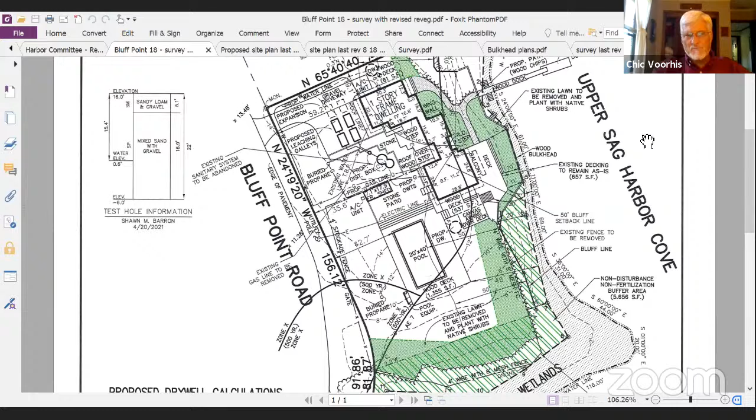My understanding is that this deck was constructed and they're looking to legalize it at this time. Everything else is pretty much existing on the property. We had asked the applicant to look into providing some buffer because there was not a lot of buffer existing, and certainly that's a big part of what we look to do and achieve. A revegetation plan was submitted. Let me see if that comes up. And it's a good native revegetation plan. These are the species: winterberry, purple lovegrass, little blue stem, low bush blueberry, American beach grass, and seaside goldenrod. I found the plan to be well thought out.

And I think that's a summary of where we were. There have been a number of hearings where it's been discussed, and I think I've characterized what the applicant has proposed. If anyone has anything to add, please go ahead. Well, two questions. One, do you have the square footage of the buffer vis-a-vis what it would be if we were to expect the 50-foot setback? I would certainly want the applicant to answer that. What's proposed now is roughly the same as what was initially proposed on this project.

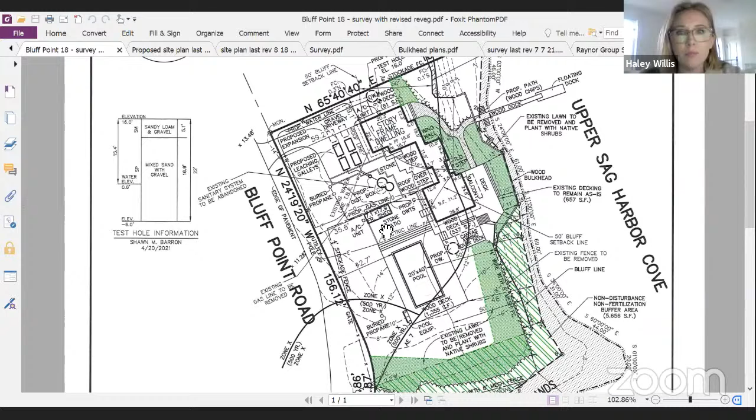And thank you, Chic, for your introduction, but I want to highlight the most significant change since our last appearance before the committee, which is that we're proposing to install a brand new IA septic system. We are abandoning the old system. I don't know if it would be helpful for me to share my screen—I have a version of what we're looking at where the septic stuff is noted in red, so it's a little clearer if that would be helpful. Yes, okay, let me go ahead and share my screen. All right, Haley, give me one minute and I will let you share. Hold on, please.

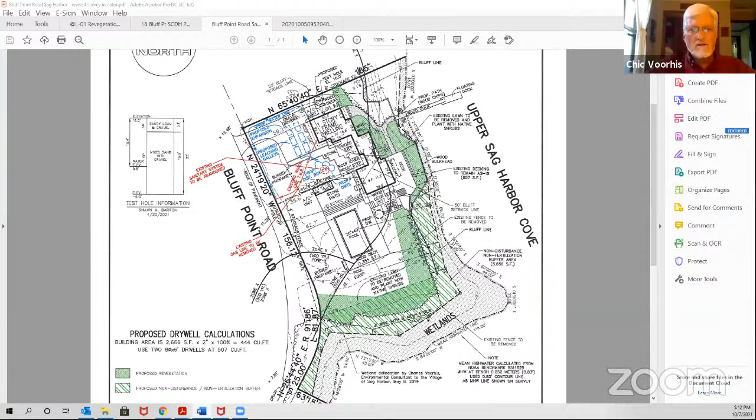It's in letter, green. Haley, you had submitted a letter on September 29th that does indicate, and maybe you can verify, that there is a pre-existing non-disturbance, non-fertilization buffer, which is 5,656 square feet. Yeah, that's right, I was trying to find that piece of paper. So the existing is 5,656 square feet. We're proposing an additional 5,500 square feet of what's currently lawn that is to be reclaimed with native species.

I have a small screen, so I can't quite see. What is the depth, including the old and the new, at any random point? Is it like 25 feet, 10 feet, or 30 feet? Because the property is surrounded by water on 3 sides, correct? Correct, wetlands on 3 sides. Will and I walked this property, it was extremely narrow. I think in some areas you can see what, 10 feet, 11 feet?

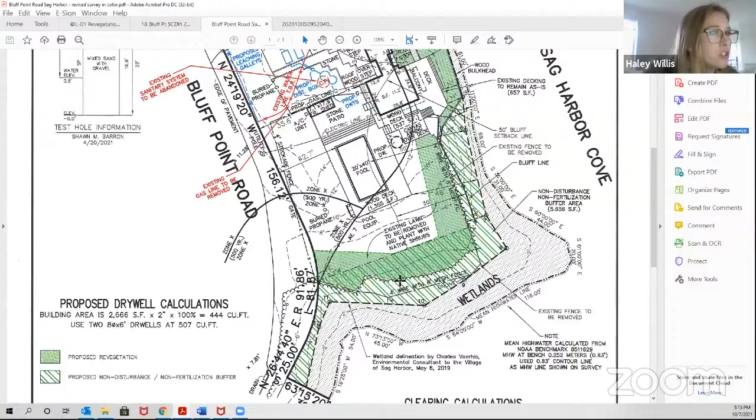I'm having trouble really seeing it on this survey, what the deepest point is, what the measurements are of the depth. We have the area calculations, but I'm not sure that we have point to point. Well, you have 20 feet in, this may be 20 feet here, yeah, 20 feet right there. So you could use that as a scale. And you can add another 10 feet right there, would be 30 feet at that string.

Out of the deck, it's 10 feet. West of the deck is 13 plus the deck. So there's a lot of different dimensions, but I guess the dark green is currently all lawn, and that's the area that'll be proposed for natives. Correct.

Okay, well I really appreciate your client coming forward and agreeing to put in an IA system. I know that we brought that up last time, and it seemed like there was considerable resistance to that idea. So I really appreciate that. And this is kind of retrospective, right? Some of this work that...

We have a canine member here, and it's not mine. Yeah, it's not mine. Not mine, not mine. I lost my train of thought.

Yes, to an IA system, and yes to more plantings. Will, do you have any thoughts here as to whether or not there was a deck constructed years ago? Is that correct? This is in the spirit of what we asked, and I'm glad to see that they were able to fit the IA where people had said in previous applications that they couldn't put it in a driveway.

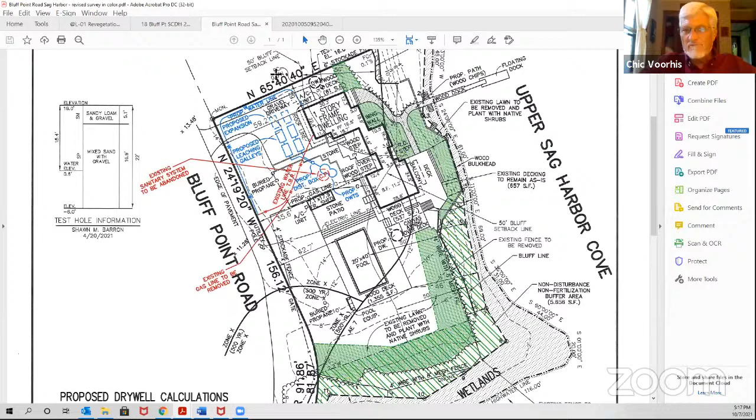I think that's a really good point. And I think that all the drainage coming off the roof would hopefully go into a dry well. Chic, does that look feasible to you from where you are? It is a little difficult to tell. There is a new proposed dry well on the north side of the one-story frame dwelling. Haley's pointing at it now.

But it's not clear whether that's for the driveway. I wonder if this maybe would. There's a dry well down by the pool, but I assume that's for the pool because that's a requirement as well. Can you use a pool dry well for a roof drain?

Good question, Will. Conceptually, you drain the pool not very often. And I think if it's been sized properly, it's been done. I think it has been done. You're not going to drain the pool in a big rain, I wouldn't think.

Exactly, no. So maybe that would be something to look into, to see if the dry well on the west side is for the roof drain - I suspect that's in there for that. I haven't looked at these drawings that carefully, but if there's a rain runoff calculation, a roof calculation, it needs to be there for the building department.

I've got another option possibly. This property currently has one or more cesspools - is that correct? In the old septic system, I would think so. They can be changed to be used as dry wells for runoff. They can be? Can be, yes.

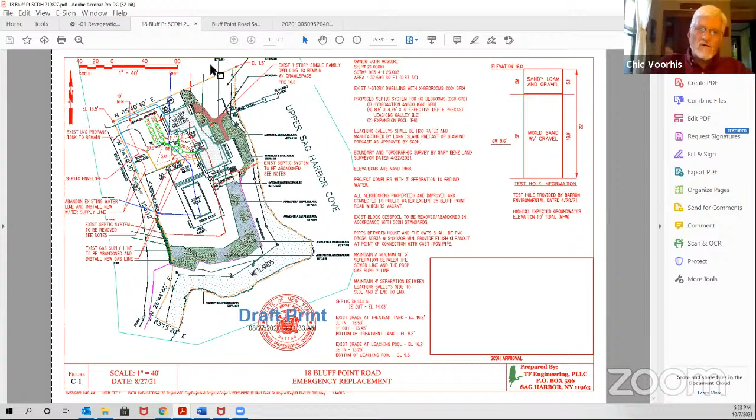Is that not true? Again, they're showing it, they're sizing it. They are showing it from the roof here. No, I don't see all the leaders and gutters, but that could certainly be a condition.

The purpose of putting those dry wells there, the gutters are integrated into the roof design. So the gutters are actually there. This is the leaders. Yeah, that's pretty simple stuff. I'm just saying I don't see it on the plan because I just don't get to that level of detail.

All right, so what I'm beginning to feel here is that people are happy. They're delighted that we have an IA system, that we have increased buffer. And there's just this little question about whether or not we can get a connection between the roof runoff and the dry wells.

So I suggest we ask Chic to write a decision and to put that as a condition of the approval, subject to his agreement that the situation is taken care of, and we go forward. I agree. Everybody agree? Okay, may I have a motion, please, to that effect?

We need to close the public hearing, Marianne. Okay, first. So may I have, I'm sorry, I just lost my focus for a moment. Can we have a motion to close the public hearing here on 18 Bluff Point Road? I so move. Thank you. A second, please. Thank you. All in favor? Aye. Okay, thank you. Thank you very much. It's a great project.

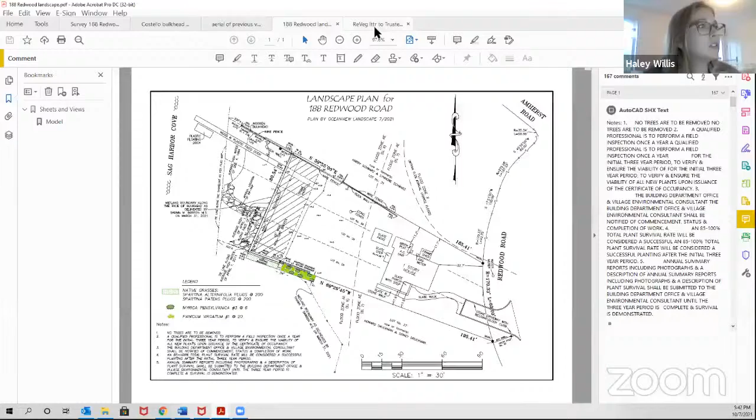So we went down and looked at the area, and I noticed there's an area that has sort of burlap stuffed things that are holding up the bulkhead. Is that, or that are acting as a bulkhead? Is that what they want to repair? And then behind that—sorry, go ahead. No, after. My question was, so is that the area they want to repair? And then there's an area that has, I guess, beech trees.

And then they want to put a bulkhead along there. Yeah, the bulkhead is existing. So I think to the extent that you saw sandbags that might have been placed there in the interim while this application is pending, that's just to sort of keep everything at bay. And then we would be extending the existing bulkhead by 24 feet back inland.

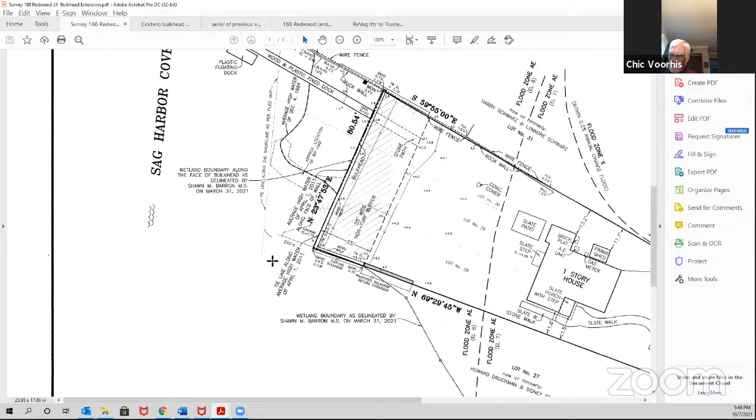Yeah, I think the issue here, Haley, is that this property, because of the existing bulkhead, sticks out farther, for lack of a better term, and there are wetlands and tidal inundation areas to the east on the neighboring property. So that gives me some concern that a new structure, even though it seems like it's back from the existing shoreline parallel bulkhead, could have some adverse effect from scouring that I mentioned before.

I agree with everything you said, and I'd also be interested if you have a planting plan, because when we were down there, there seemed to me to be significant trees right there on that lot line. I don't know what the future is of those trees if this plan were to be approved.

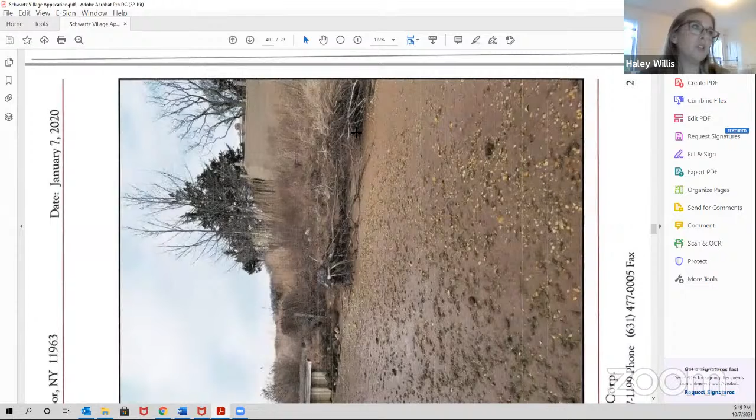Those trees probably do more to secure that shoreline than the bulkhead's going to. So the trees - this is a picture sideways, but you can see that I believe these trees are down now. This is what was cleared. And as you can see, this is sort of the erosion that we're concerned about, that everything is falling out the side of the existing bulkhead, as it were.

So this would be extended back to hold that together. But there's not much left here in the way of trees.

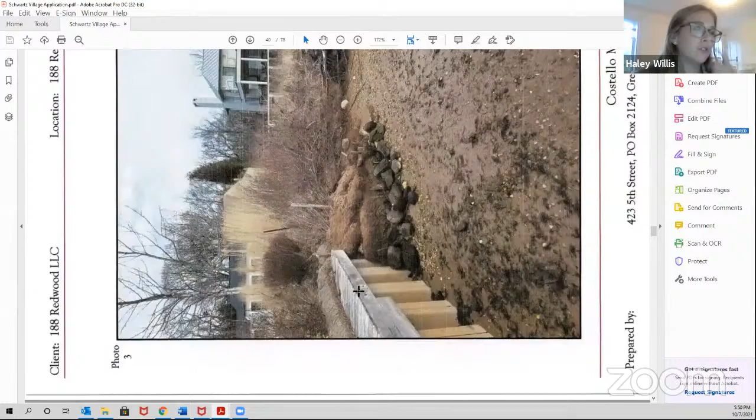Haley, you and I went there today. Didn't we see significant trees that looked like they were right in the path of this extension? It's hard for me to look at a picture sideways. I'm sorry, let me try to fix that on the computer.

Chic, do you think when this property was developed that the bulkhead was built, some kind of retaining wall was built, and it was backfilled to increase the footprint of the lot? Oh, I do. That's certainly what it looks like based on aerial photographs.

Yeah. Not much we can do about that, is there?

No, but I think Chic is right in saying that this area here, where it's all brambled and leads into the existing bulkhead extension, begs for a natural shoreline kind of answer.

Chic, quick question for you, along the lines of what Mary Ann just said. If the applicant were to attempt a solution using a more natural shoreline approach, how long would it take for you to be able to say it's working or it's not working? How long would something like that take to prove out?

Well, it's really up to the applicant to have a designer bring forward an alternate proposal that they feel would be successful.

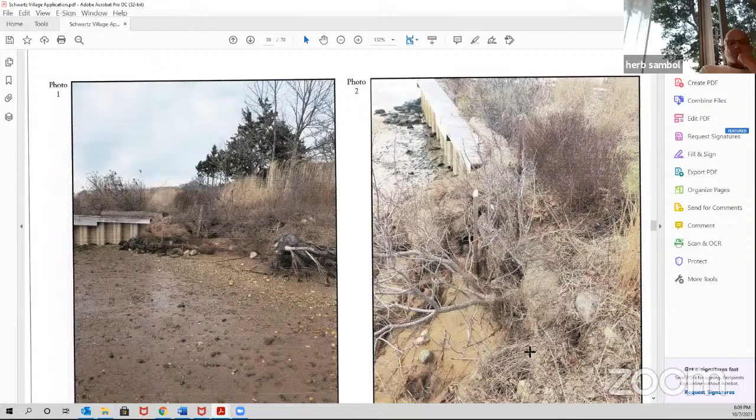I didn't understand what the problem with the existing bulkhead is. Neither did I. Just checking here, because that's not part of the application at this time. The application is just for the 24-foot extension, the way I'm reading it. It does not include the existing bulkhead. It looks fairly substantial. Is it compromised in some way?

Yeah, I mean, the project narrative that we submitted says it is in need of repair to the existing bulkhead. I don't have any photos of what is needed there, but my understanding was that the bulkhead did need fairly urgent attention.

Well, it's kind of surprising here, because we think we only have an application for a 24-foot extension. Did you write the application? Yes.

Chic, when you saw this application, did you understand it to be repair of the existing bulkhead plus a 24-foot extension? I'm looking at the plans, and at this time, again, it's all moving quickly and we're juggling files, but I do not see anything that makes reference to rebuilding. It just says existing bulkhead, and then the proposed part is the 24-foot extension. So I don't see anything in the application that suggests the existing bulkhead is being rebuilt.

That's the plan. I'm going to double check the narrative while we're talking. I guess when I went and visited it, I saw the area that's being eroded - would riprap be the solution, as opposed to starting another bulkhead repair, as we've just discussed, or planned?

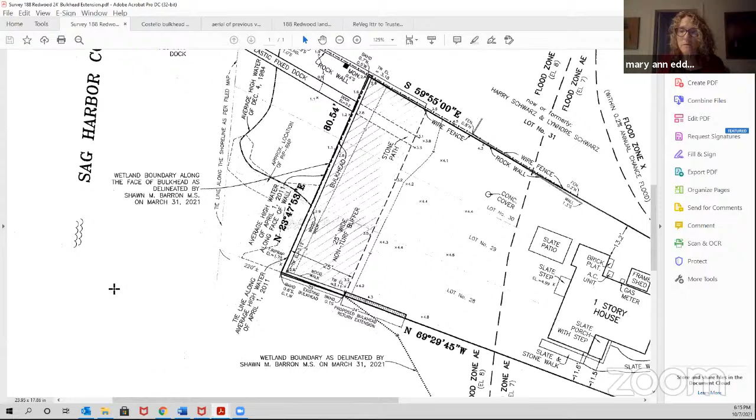Okay, so that's 188 Redwood. We've now moved on to 10 Yale Road. May I have a motion to open the public hearing? I so move. Second, please. Is all in favor?

Aye. Is there somebody who can speak for this application? Yes, Melissa Dedovich, Peconic Environmental Associates.

Hi, I'm joined by Brian. Actually, Brian DeSessa was supposed to join us tonight, and unfortunately he was unable to make it, but never fear, we can still do this. I'm joined with Elizabeth Sammartino from Blaze McCoy Architects, Stephen Naroda from Aris Landscape Design, and the property owner, Dan Marsili. Liz is going to be kind enough, if Doris, if you could share your screen with her, she has all the presentation materials ready.

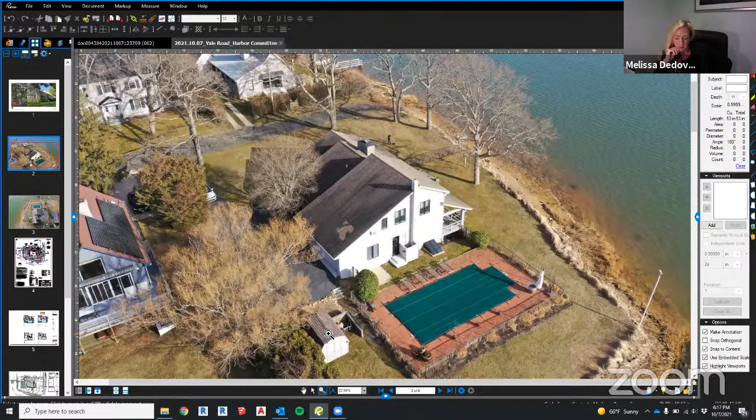We also have the existing detached shed, and there's an LP gas tank as well. There's a slate patio, if you can go to the next picture. You can see it with the table on it, on the left-hand side, as well as a 1,981 square foot asphalt driveway and parking area.

There's a substandard septic system right now between the house and Yale Road. And the house itself, I just said there's a clarification on the notice, it was incorrect. The house, and where the proposed work is going to be done with regard to the house, is located in a FEMA X zone.

So my clients purchased the property for their family, it's their full-time residence, in 2016. They have two young children, and they needed some more rooms. Originally we thought we were going to demolish the house and build a new house, but as they lived in there, they realized it was a pretty solid house, so they'd rather retain and renovate it than demolish and build new. So they hired me and the team in 2018 with the thought to come up with a plan that was sensitive to Sag Harbor Cove. The team met with Tom Priato to review our requirements, our zoning, and the environmental concerns for the property.

We spent the last 3 years getting our DEC tidal wetlands permit and our health department board of review, because where it's located, it needed board of review and about 5 variances from the health department, which we obtained. We also got village ARB approval while waiting to be heard by your board, so harbor committees are our last hoop to jump through.

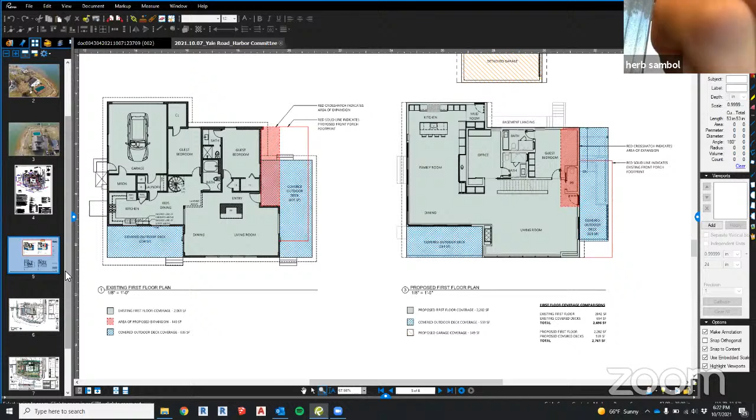Okay, next if we can go to the existing landscape conditions. I'm going to have Steve here from Aris Design go over this portion of the project. Sure, good evening everyone. This is Steve Naroda with Aris Design. Thank you for the opportunity.

Melissa kind of covered it, but the existing conditions are predominantly lawn area within the 50-foot buffer. As you can see in that aerial image, it amounts to about 90.5% cleared within the 50-foot buffer. With what we're proposing, we're reducing that by over 50%, down to 36.9%.

And adding in a robust native planted buffer that will complement both the surrounding setting and the lifestyle of the homeowners. The pool area right now, as Melissa touched upon, is fairly large. It's a vinyl pool sitting within groundwater, it does not have a dedicated dry well for backwash, and it's a little lower than the finished floor of the house.

So we saw this as an opportunity to introduce a pool that would be environmentally sensitive. It's a saltwater gunite pool, and we're retreating from the wetland approximately 5 feet with the new pool, and we're going to have a dedicated dry well for pool backwash. There are some significant native red oak trees surrounding the south and east sides of the property that we're preserving.

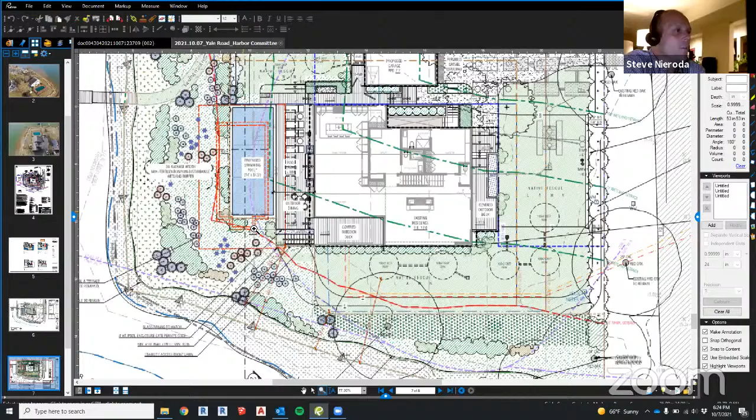On this diagram, you can see the red dashed line on the west side of the house, that's the existing pool area. The pool patio extends to the west of that, a little larger. You can see the new pool retreats from the wetland and it raises up. We match the pool terrace, or the pool coping, with the house deck, so we're able to get above groundwater.

I think Liz is trying to get to the section we created. You see that red dashed line, that's where the current pool sits. It's a vinyl pool, been there a very long time, since the 1980s. Suspect it could be leaking. It's chlorinated. So the proposed pool is now being lifted to a higher elevation and will be totally out of groundwater, so no dewatering will be required for the new pool. Actually, no dewatering will be required for the project in general.

Graphically on this site plan, you can really see the amount of buffer we're introducing. It surrounds the whole west side and south side of the property. The buffer will be equivalent to almost 7,000 square feet of native vegetation planted on the property. Anywhere we're showing upland areas of lawn, we're calling it native fescue lawn, a native fescue seed mixture, further reducing any need for chemical and fertilizer inputs.

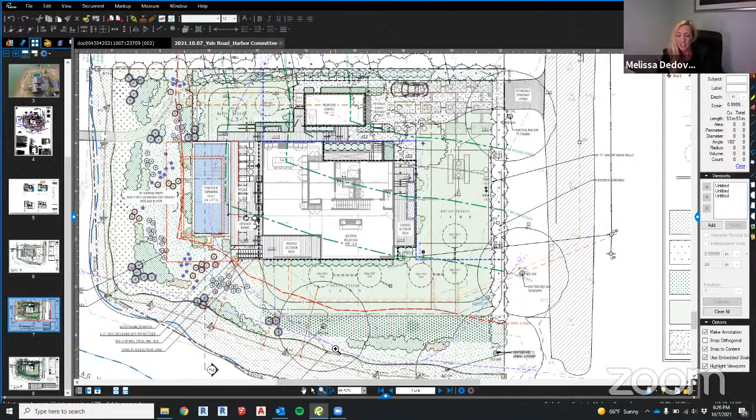We've filed a construction plan and methodology. We'll be using project limiting fence around the proposed area of disturbance. Just to note that everything being done is within the existing limits of clearing, we're not extending any further towards the wetland. In summary, I'd like to reiterate that we've received all our approvals to date. We have full support of the neighbors, who provided letters for both the ZBA and ARB applications. All work is to be contained within the current site disturbance clearing. The existing legal dock is to remain, no dewatering during construction. And we believe we meet the requirements outlined within the village code for a wetlands permit. We're here to answer any questions.

Not exactly, because you're putting a pool within 75 feet of the wetlands. Where a pool currently exists and was legally installed with a DEC permit back in 1980. In 1980, right. Chick, do you have some comments on this?

Well, I hear both sides of it. Mary Ann, you certainly mentioned the village setback is 75 feet. Their plan shows the 50-foot setback, and it basically goes through the 50 and the 75. The 50 cuts through the existing house, and the 75 cuts through most of the existing house. So it is an existing condition, but we do recognize it's a sensitive piece of property, with Colgate Basin to the west and Upper Sag Harbor Cove to the south.

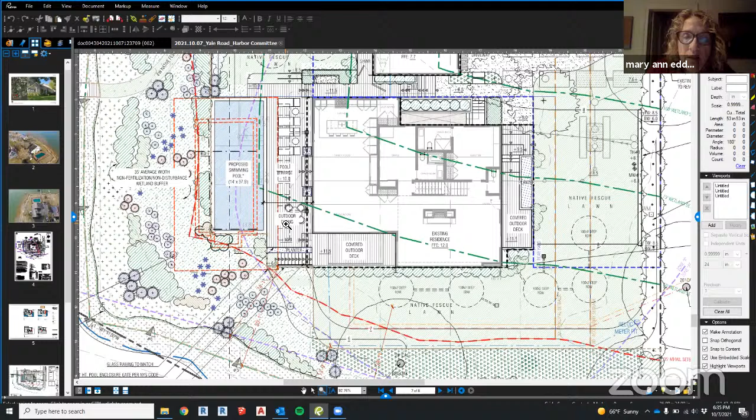Chick, are you familiar with the kind of pervious decking they're talking about? I think when Melissa said Ipe, that's just a wood material. It's just wood decking, not stone and mortar. It's probably on sonotube, not concrete or solid stone. There's usually some spacing so the wood doesn't rot, and it allows some penetration of stormwater through it.

Just to chime in, it's not set on a concrete slab. This will be pervious material below the deck, so the deck is floating above that pervious material. So it's a basic wood deck. Yeah, correct. So yes, I'm familiar with that, and it's Ipe wood, so it's tropical hardwood.

What's the depth of the deck from the door to the pool area? It's 14 feet from the door to the inside coping of the pool, of the proposed pool. Got it, thank you.

And like you said, except for the self-contained portion of the septic system, the actual leaching fields, those aspects of the new septic system are a minimum of 100 feet from the wetlands, is that right? Actually, the term you used is correct. The leaching field is beyond 100 feet. Yes, right, and that's the minimum for the village wetlands.

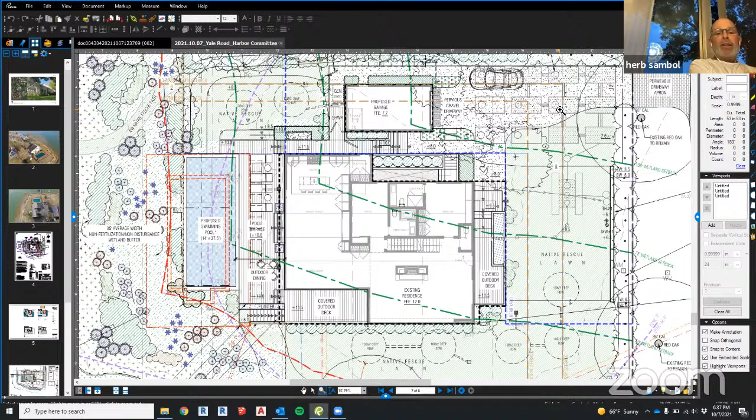And I'll tell you, we spent almost 2 years with the health department, if not 2.5, because we had to go back and forth. The IA system, this was before we had to, so we wanted to do an IA system to present to the board. And we ended up having to go to board review and receive at least 5 variances from them to do this.

Melissa, are there any other variances that you're requesting, for example with respect to lot coverage or anything like that? I don't believe so, not from zoning. We went to ZBA for the garage. I can double check that. I have no problem with that.

Can you tell us a little bit about what you went through with the health department for your IA system? What were the things? I wish I had Katie Maresca from Maresca Engineering, from Steve Maresca's office. It was about the fact that, first of all, they're not thrilled about putting a septic system under a driveway.

In order to meet the distance to groundwater, we had to make sure it had enough space, so we had to use the leaching galleys, which are a little tricky. We had to get permission to not have to put expansion galleys in. Normally you're required to put 50% expansion in, but we don't have the room for it. There was the question of one galley being too close to the garage, and one galley too close to the house.

But the board actually approved it via an executive session, because we were also going through COVID. So it takes 6 to 8 months in normal times, and Chick knows this, to get in front of the board of review. And luckily, Ed Lyons took a look at it and said, you know what, you have no other place to put this, and was able to get board members to sign off on it.

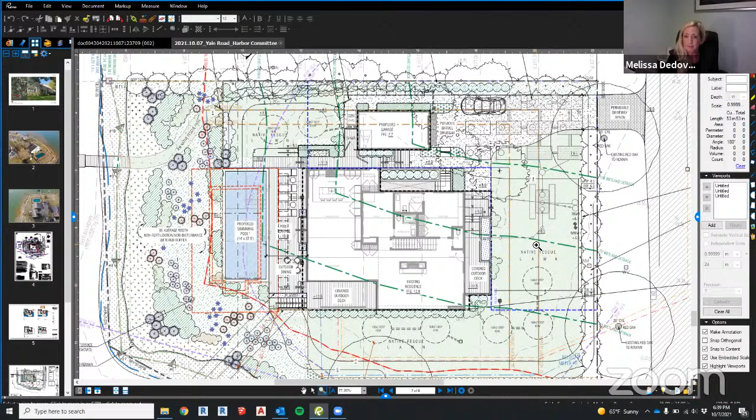Thank you. And I will just point out, I think Herb asked this before, but it looks like the expansion galley, the southwesterly one, is just within the 100 feet, but the actual constructed or used leaching galleys are all more than 100 feet.

And I didn't mention before, but there is an impervious driveway currently, correct, Melissa? Correct. There's 1,981 square feet of pavement that we're pulling out, and that's going to be a proposed permeable driveway.

Correct. I can't read this diagram so well. Can you tell me where the runoff from the roof goes? Sure, Liz, can you zoom in? Yeah, on the southeast corner. Do you see that dashed line, Mary Ann? That comes off the house. Yeah, that's one spot. So we worked with Blaze McCoy's office in locating where these roof leaders are, and we make sure we run them to drywell. So then if you go to the west, yeah, there's the next one.

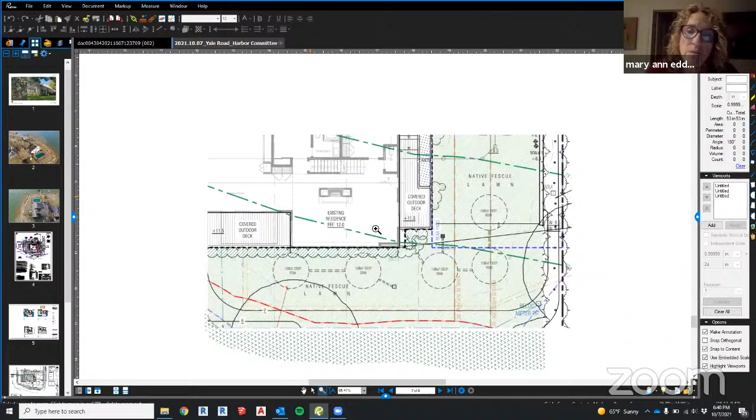So where is it from the garage? I was thinking about the new garage. Is there going up to the north plan there for the garage? Yeah, there's a separate one. There is a full drainage plan. We didn't have it up for the presentation, but there is a full drainage plan. There they are, and it's right in the back, and it was done by Steve.

I believe Steve Maresca's office did the septic as well as the drainage. No, we did the drainage, Melissa. Oh, okay, yep. They're 10 by 3. Yes, okay, 10 by 3. They're shallow because of the groundwater concerns, so that's why we added a second one, just for overflow. And we do have a dedicated pool drywell too, even though it is going to be a saltwater pool.

So the garage looks enormous. Is it as enormous as... No, that's a single car garage, and it's very tight. Oh, it looks almost as big as the 20 by 40 swimming pool. No, that pool actually is 14 feet wide, one lap. Oh, but okay, the garage, yeah, okay, I see.

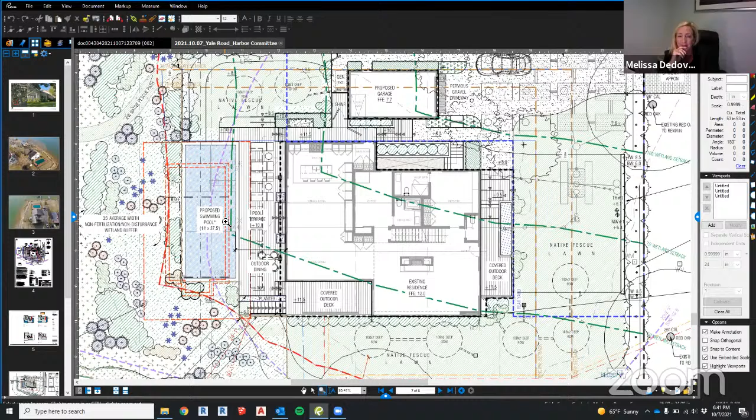I would like to make two comments. One, I think when you're renovating a house rather than tearing it down, that's a good gesture. I appreciate that work; it maybe costs more than scraping and starting new. I think that's commendable, just as an observation, and I appreciate that.

Thank you. What is the reason the ARB saw this before us? Clarify that for me. Just that everything was taking a while to get in front of your committee, so we wanted to save some time by doing it simultaneously. And the ARB loved it, and they put us to public hearing, and it was unanimous. They're like, good, like a harbor committee. And Liz Vale said the only thing is if they make you change something, you'd have to come back. We were willing to take that chance, but they loved it.

Okay, any other comments? I think there's a lot of good here. Thank you, actually, thanks to our clients, because they really put a lot of effort into this, and it's wonderful to work with a project sponsor like that.

Herb, John, Parker, I haven't heard anything from you on this. No, I've been watching it, I've been looking at it, and I think, again, we're upgrading to an IA system, which to me is the biggest advantage, and we're getting additional buffer. I mean, again, this is all existing, and what they're proposing is much better than what we have now.

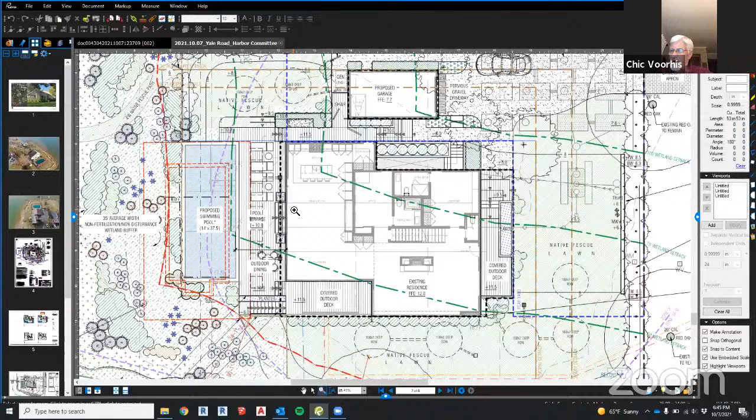It's pretty apparent what we're talking about here. The committee has discussed it. There are advantages that I will structure into the permit, and there may be some standard conditions, but I don't see anything unusual or different here.

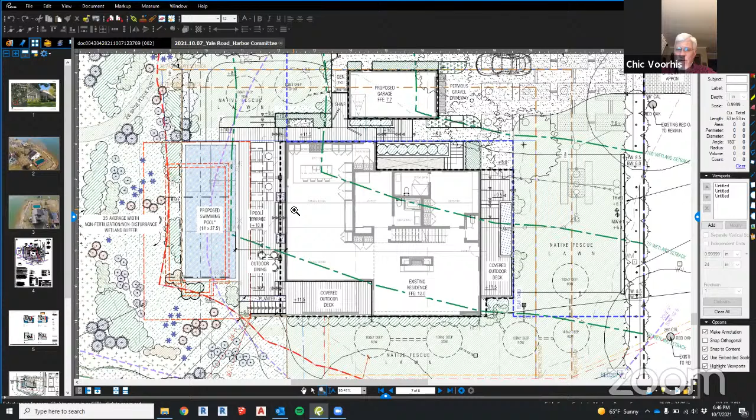Okay, I think when you write the decision, you need to really emphasize why we're taking this position on construction of a residence that is not in alignment with Harbor Committee rules. Totally agree. I'm very much aware of precedent, and I'm looking at this as its own unique case that stands on its merits. I'll definitely incorporate that into the decision as to why we feel this is consistent with Chapter 285.

Okay, and Chic, I'll get you that chart by the end of tomorrow. Can I ask for a motion to ask Chic to write up a decision approving this application? I'll move. Second? I'll second. Okay, all in favor? Aye. Aye. Okay, thank you very much everyone, have a nice night.

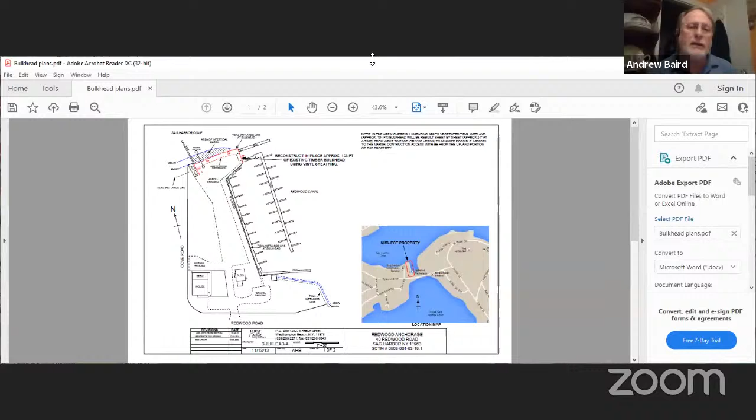And to the left, suggesting that between the gravel and - hey, there we go. Look at that, okay yeah, there we go. Thank you, Chic. You're welcome. Thank you, well done, well done. Teamwork here.

Oh, so we're talking about 104 feet altogether of bulkhead.

My memory is that the grass area goes all the way down to the water, but that's not what this is showing. It's showing that the gravel expands towards the top of this lot. Is that accurate? Is that what you remember? That's accurate to my memory because it kind of has to be so that people can use the boat ramp.

And is this little - oh, I see the little tiny, right, there's the boat ramp. The area to the west of the gravel is basically grass. Yeah, yes.

So I see that in the aerial photograph - it is used for boat storage, boats on trailers. Of course, a marina with boat storage needs a place to store them. So that's kind of a boat storage area.

Well, I know that marina. They also - I'm sure you do too - far to the right of this diagram, there's a lot of places where boats are stored over the winter. Yes, up near the road to the right. You're correct. Right, yeah.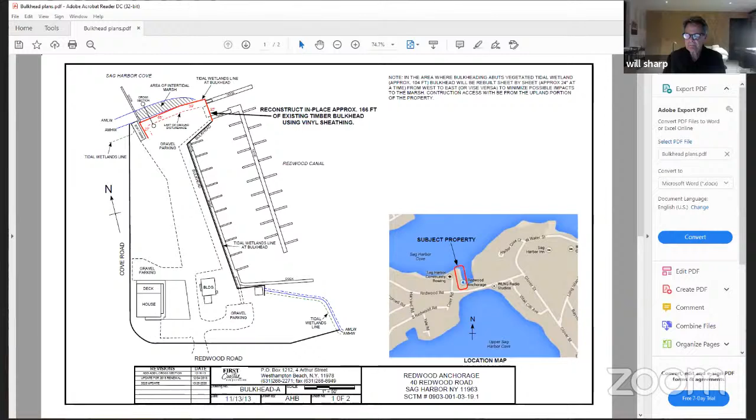The next application I see here is 100 Redwood Road. May I have a motion to open a public hearing? I'll make the motion. Thank you, Lily. Second, please. I'll second. Thank you, Will. All in favor? Aye.

Is there somebody here to speak to this application to the committee? Yes, Matt Ivans, can you guys hear me? Yes, great. Hi, Matt. Hi, guys, how are you? So I'll give you a real quick background on this.

Some of you board members were here when this was approved before, but this project was approved on January 11th, 2016 for the construction of a second-story addition on top of the existing two-story dwelling. There was going to be no encroachment to the wetlands whatsoever than what already existed. It also included the installation of a new sanitary system up by the street. The existing septic system, as you guys should be able to see on the survey, is pretty close to the wetlands boundary.

Matt, let me interrupt real quick. Are you able to share your screen? I hope so, let's try it. Okay, let me make you co-host. Hold on, I'm back, I can help with that if needed. All right, okay. You ready, Matt? You ready? All right, bear with me here.

Here we go. All right, tell me if you can see that. It's coming, it's coming. All right, there you go. All right, you got it? Let me zoom in a little bit too, so this makes this easier. Let me just move this here. Why doesn't this let me move it? Oh, there we go. Beautiful, okay, good job. All right, so nobody's gonna get vertigo, hopefully.

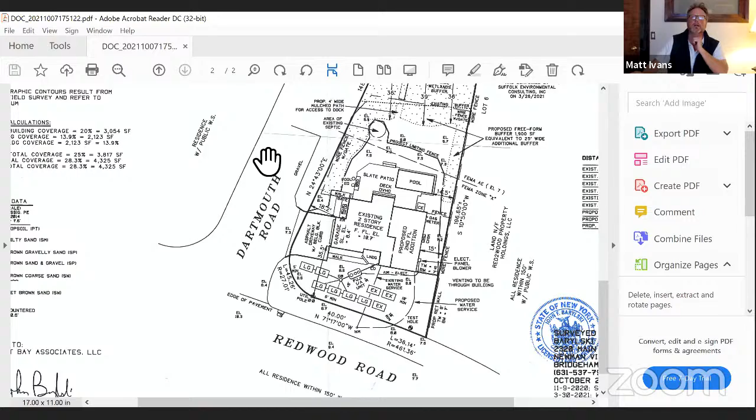I had John Barylski do the calculation, so it is exactly the same square footage. You can see that here. Also different in this application is the fact that instead of the standard sanitary system, we're going to go with the IA system. John Barylski is manning that. He is down to, he's almost near approval. He just needs approval from your committee, actually, to gain that.

Okay, so you have Suffolk County all on board? Yep, Suffolk County was applied for months ago. I had the notice of incomplete application I'm looking at, and they do require village wetlands approval. Okay, so that's about it. You can see the planting plan before you. I've read Chic's comments, which are somewhere here, but...

And this patio, is that pervious or impervious? That's impervious. And are those rhododendrons native rhododendrons?

They're not native, but let me try to put them up. These things are quite established. They've been there for, I'd imagine, about 10 to 12 feet tall. Does this come up? Can you see those? Yeah, sort of.

So are those being considered part of your native buffer? We included it in the native buffer, and we don't have a problem with removing the lily turf, the low line grass plants in front of it. There's a hydrangea in front of that.

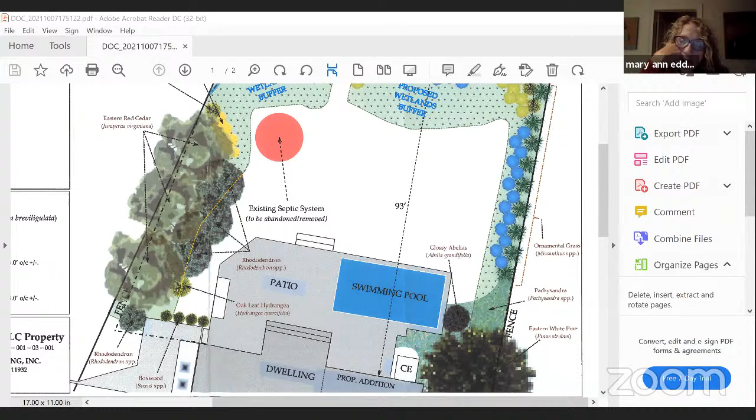Yeah, I believe the owner seems amenable to that. Keep the rhododendrons, but swap out for a little bit more really native plantings. That's my thought. Okay.

Any other comments here? Have you looked at the planting plan, Chic? Yes, we had those comments. It's always tough. Rhododendron is native in some areas of Long Island on the North Shore. It's fairly rare, but it is a native plant to the Northeast, so I'm not too concerned about that.

We had talked about the ornamental grasses. I think we're trying to work with what exists and not disrupt the site too much, and I would agree that favoring the area toward the water with native plants would be the best strategy.

Matt, could you go through a little more detail on what you're proposing in those areas for the proposed wetlands buffer? Just the types of plantings, basically? Yeah, sure. The majority is going to be Cape American beach grass, in these areas here, which you can see in the polka dotted or stippled sections.

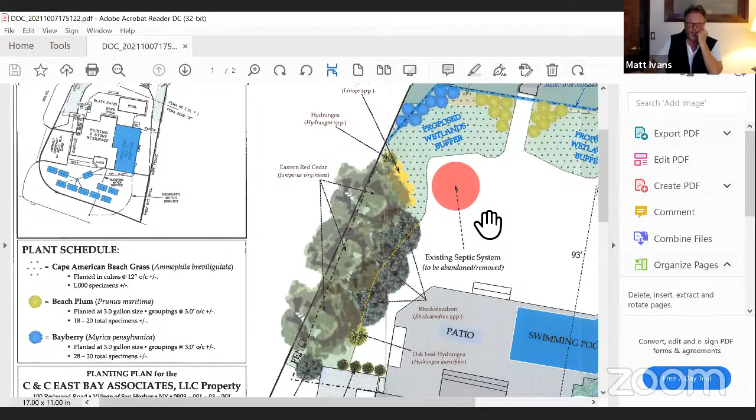Groupings of beach plum here and here, over here as well. And then we're going to throw in bayberry, this corner here, right up there, and along here. It'll be pushed back once we get rid of the miscanthus, which was requested by Chic.

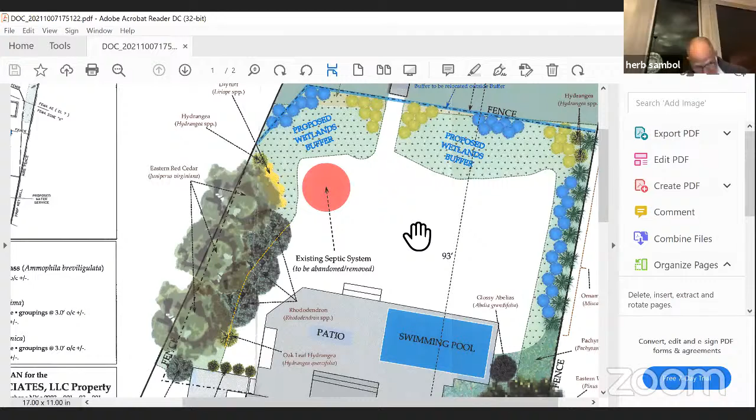So how are you going to make sure the lawn does not interfere with the native beach grass planting areas? Is it possible? I've seen other projects, we did one I think it was LaDuca next door a number of years ago with Dennis Downs, and it was maintained well. It didn't seem like there was any encroachment whatsoever into the lawn or into the beach grass.

And can you tell me about the swimming pool? Is there a fence for that swimming pool? There is, it's out right over here, as you can see. Oh okay, and this is also, just to let you know, proposed to be relocated to the landward side of the buffer. Okay yeah, I was going to ask about that.

Questions, comments from the committee?

Everybody happy? I think the planting plan out front, or to the wetlands, is great, but I know when you put in that IA system, there are a lot of pre-existing trees up front. Are those all going? What's going to happen to those?

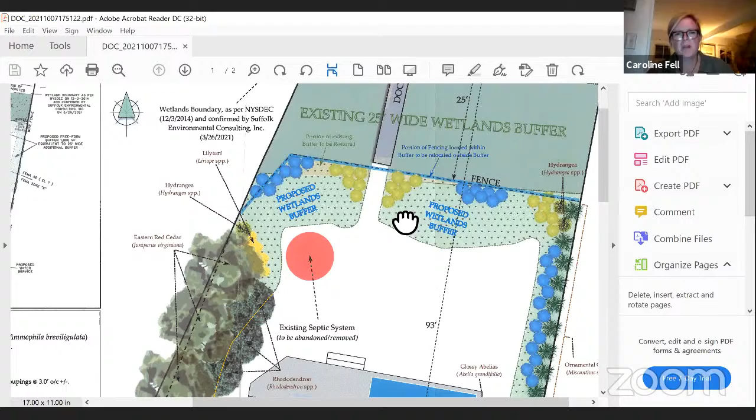They're going to have to go. The health department requires you to put a sanitary system on the street side. There's nothing we can really do. What about under the driveway?

The health department, you can do it via covenant and a substantial fee, but you have to prove a hardship. In short, I don't mean to be short, but the health department doesn't seem to care about trees.

Right, what are you going to replace them with? Are you going to put new trees back? That I'm not sure yet. You can't put them in the leach field.

There'll be maybe foundation plantings at the most. You can't throw a tree in there because the root system will end up compromising the IA system over time. But like a fescue lawn in front or something like that?

Yeah, he might. I don't think he's 100% sure, to be honest. The owner, that is, sorry.

And do you have a little chart there that shows the square footage of the buffer area compared to what a 50-foot straight across buffer would be? I have all that information. It's not on the survey, but I can read it into the record if you guys want.

So the existing buffer is about 1,730 square feet, about 12.1% of the property. With the addition of the 1,900 square feet additional, the overall buffer becomes 3,630 square feet, which is about 25.4% of the property. That doesn't include the wetlands area.

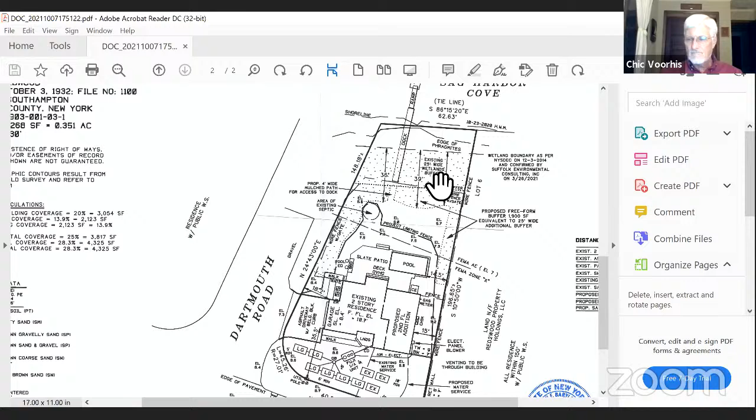All right, I think we're at the point of taking a vote. Did we just have a motion? We had a motion, I need a second. We don't have a second. I second. Thank you. All in favor? Aye. Okay, good.

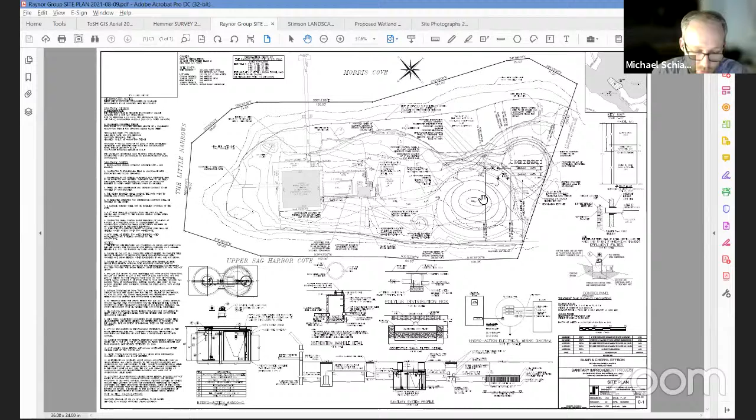We are also removing existing areas of lawn. Essentially all lawn on the site is going to be removed, and also as much upland non-native vegetation as we can. We're going to construct a new pervious driveway and new pervious parking areas.

We're also going to construct two elevated walkways that are going to go through the areas to the north of the house and the garden over here. Those elevated walkways are going to be made of untreated wood and designed to have light-penetrating decking on them so that plants can grow underneath them.

There's going to be a bench seating area to the southeast of the swimming pool, and the area of the proposed driveway is going to have kind of a mounded area here, where 221 cubic yards of clean fill are going to be mounded in this driveway turnaround area.

There are also some areas of existing fencing located to the north of the existing septic system and north of the house that are going to be removed, which I believe were installed at one point by an overzealous landscaper who was trying to keep some of the deer away from eating some of the existing plants. But we are removing those and moving them out of the native vegetated areas as part of this application.

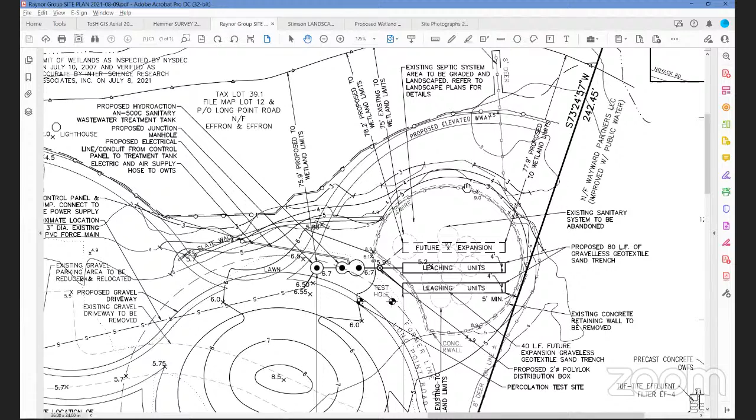So we're showing the expansion, but actually the existing leaching pools on the septic system are 80.6 feet to the wetlands to the south and 75 feet to the wetlands to the north. The proposed IA system will be at a minimum of 82 feet to the wetlands to the south and approximately 85 feet from the wetlands to the north. So we're increasing the setback to the north by 10 feet and increasing the setback to the south by 2.2 feet, which is about as much as we can manage based on the area that we have.

In addition, the leaching fields — sorry to step on your toes, Rick, I just thought of this — the leaching fields can't go under any driveway, unlike leaching galleys or leaching pools. You can't put them underneath a driveway, and the health department really discourages it.

Because these are shallow units, is that why? These are shallow drainage, yeah, it's not... Yeah, they're not made of precast concrete. They're made of it's like a geotech-style filter fabric material, so they would crush, and then there's a PVC pipe that runs along the top of them that distributes the effluent.

So they'd be crushed if it was under the driveway. Yeah, the benefit that you get from having the shallow drain field without having to have any fill for that system is that... there's very limited area that you can put them in, and also they do sometimes take up more area, but thankfully we were able to fit them in a location that is a little bit more conforming than the existing system.

Chick, is this the first time we've seen a shallow drain field? I don't have instant recall on all of our applications. This is a very constrained site, obviously. I just don't remember seeing one. Yeah, I feel like we've seen them. What's really good is it's necessary here because of the shallow depth of groundwater, but you get extra treatment in the root zone. So they're good systems. I would definitely encourage it, and it looks like it's needed here.

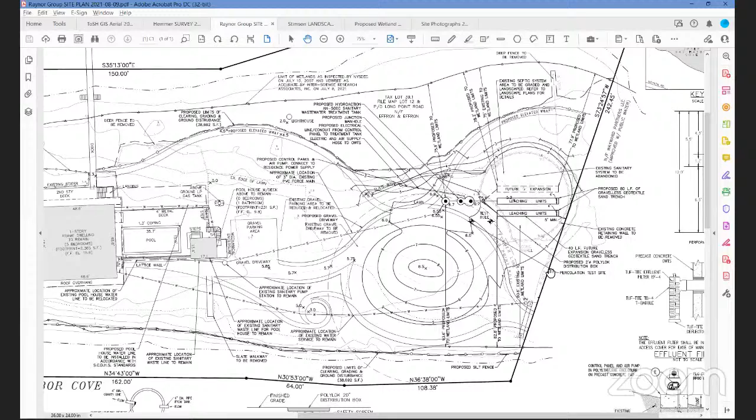And Rick, what was the last thing we heard from the health department about this? We're pretty much just waiting on approval from you guys. That's the only thing holding us up right now. Okay. Do you guys have any other questions about the IA system at this time? No.

Okay, I have a question about the walkways, if I may. Yeah, sure. So I'll let Joe talk about some of the proposed landscape design, and then we'll go through that stuff. Okay. Joe, yeah, I can share my screen. Sure, let me stop sharing, and then you can go.

All right, can everyone see my screen? Yes. Great. This is just a prettier version of the plan Mike just shared with you, and I think Mike did a good job of describing it, so I'll be brief. With the improvement in the septic system, our clients saw an opportunity to improve the ecological and aesthetic quality of the property, as well as to try to create a continuous path system throughout the property so that they could occupy or access more of it.

Starting at the property line, the driveway is being reconfigured. We're proposing, instead of a fully paved driveway width, to do what we call tire strips of pavement with a native planted median in the center. This reduces the scale visually and physically of the driveway, making it feel more in scale with the pathway systems we're proposing. Those strips of driveway blur and blend into a pathway system that wraps around the central low landform, as well as connecting into the boardwalks, which move through the existing cedar trees at the top of the page.

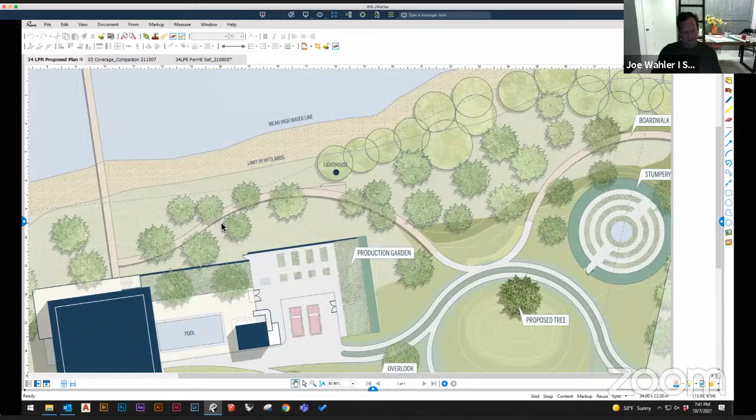And the walkways—are those on pilings, or what are those about? The boardwalks, the boardwalk paths on the north side of the property—is that what you're asking about? I guess the application talks about elevated walkways. Yeah, so we have two elevated walkways linking from the pier at the main house through the existing cedars. These are the existing cedars, so it's weaving through them, then touching grade again here, and then we've got another boardwalk departing from grade and arcing to the right.

These are elevated walkways. They have untreated wood posts directly buried into grade at the center line of the boardwalk, a joist system spanning from the beams at the posts, and boards placed vertically so we can maximize sunlight penetration through the deck. The decks are also elevated just under 30 inches from existing grade in order to increase light penetration from the sides. Do you have a picture of that? Yeah, I can bring up the sectional detail. I have that I can bring up. Great.

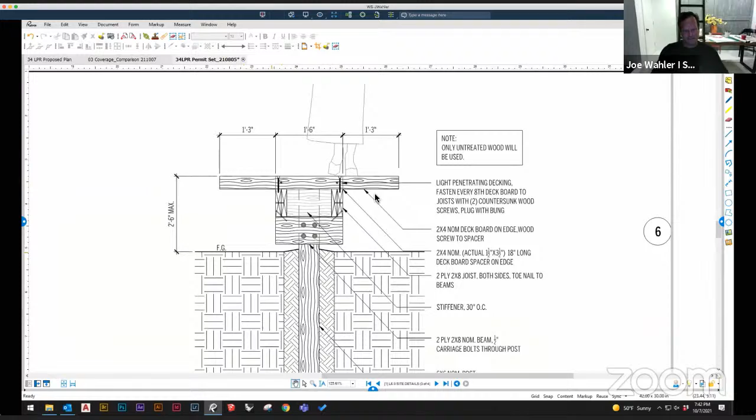How frequently do you have to have a joist in there, how many feet? Our posts are spaced roughly 8 feet on center, and then our beams are at the post, and our joists are spanning from post to post.

And because the height is below code requirements for handrail, you guys dodged that bullet? The intent is to keep it low enough to keep these very minimal while maximizing the amount of daylight, given the angle of the sun, to penetrate underneath it, in addition to the open structure of the surface of the boardwalks. How slippery does a deck like that get after 3 to 5 years?

It's a really great question, because we're setting the narrow edge of the board vertical. We're going to have a lot greater slip resistance on this deck than a typical deck board placed flat.

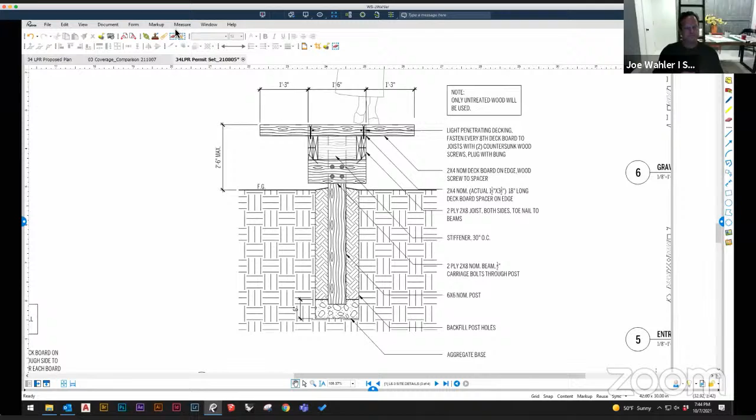And how much space is there between these vertical boards? Let me see if we've got that cross section here. I think we've got them spaced an inch and a half on center. We're using a 2x4 deck board, and we're gapping it the width of another board, so they're an inch and a half apart. That's nice.

What's the material of the decking? We're still exploring sustainable options. We're looking at black locust, thermally modified ash materials. We're hoping to avoid using tropical hardwoods and looking for sustainable alternatives. But currently, I think we're planning to use black locust.

FYI, there's an organization in Philadelphia somewhere that has acquired large amounts of decking from Coney Island and elsewhere after the last storms. I put some in my house, it's Ipe. It's bomb proof. I've got a train going by here. You can find Coney Island decking secondhand, and it's remarkably inexpensive.

What is Ipe? It's Brazilian, a tropical hardwood. I don't think the state is allowed to use it anymore. People say it's sustainable, but there's a debate about that. But there is boardwalk material available on the secondhand market, and it's beautiful stuff. Why, just because it's available and it's nice to reuse things? What attracts you to it, Will? Yeah, it's a hardwood, and you're repurposing something from Coney Island. How cool is that? It's like my counter that's an old bowling alley.

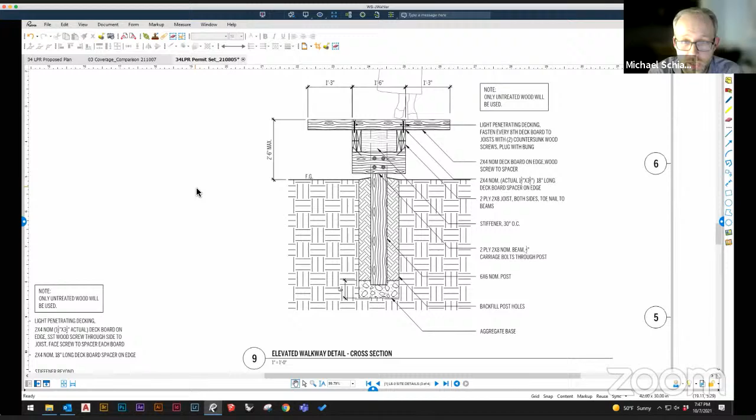I think it's brilliant. And as opposed to just having pedestrian paths, you'll actually get the areas below it to be vegetated. Right, so yeah.

Maybe we'll get you to make a presentation when they're talking about John Steinbeck Park, because I don't think anybody's thinking along these lines. To my dismay, they're putting in a rockway there, and I don't think it's going to be light permeable. But I don't know, who knows. This is great. Any other questions?

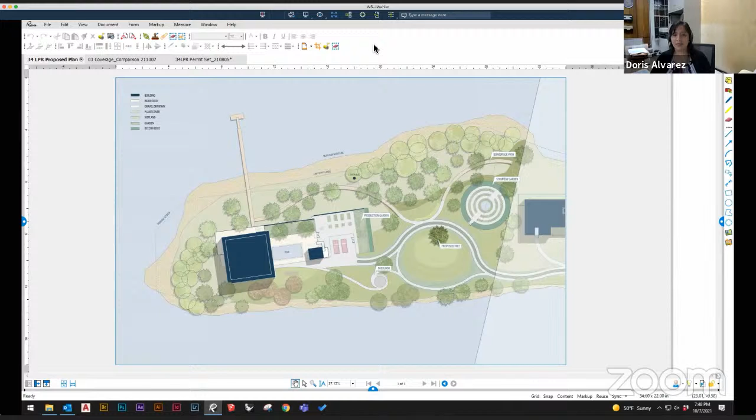My only question was, can you state your name for the record please? Yes, thank you, David Nelson. And are you a neighbor? I'm across the cove from this property. Usually we ask people to give their names and addresses, I'm not trying to give you a hard time, but we usually try to do that for the record. Okay, David Nelson, 3 Bluff Point Road.

So my only question was, I think the fill number was 221 cubic yards, which strikes me as a significant amount compared to that property, which is about 2 feet above mean high water. So I would like to know where that fill is going and why.

Okay, if the board would like me to answer that, I can answer that. Sure, okay. So number one, we are actually going to be reducing the amount.

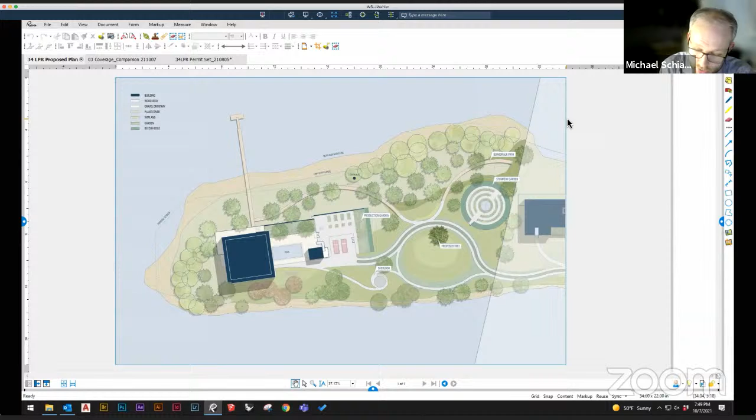So while we were saying that we imported fill, because we're also removing the elevated retaining wall, there's going to be a net reduction of fill by about 50 cubic yards overall. But the new fill that's going in is all for the driveway turnaround area. There's this mounded area that will also be vegetated with native vegetation. So I understand the concern, but we did try to make sure that any fill on the site is going to result in a net reduction overall.

But are you going to take the fill from one place and put it into this new location, adding it until you fulfill your design requirements, or are you getting rid of that fill and bringing in all new fill?

I do not believe we can use the existing fill where the septic system is, because we have to dispose of it based on how the health department wants us to dispose of it. So it'll probably be new fill, and we have specific designs for how the mound around the driveway is going to be installed. That was just based on what our numbers are.

So your question was whether we would bring in fill until we were done. Because we are removing this area and adding this area, we were able to say that the septic system area has 279 cubic yards being removed, and the driveway area has 221 being added. So we were able to do those calculations very cleanly.

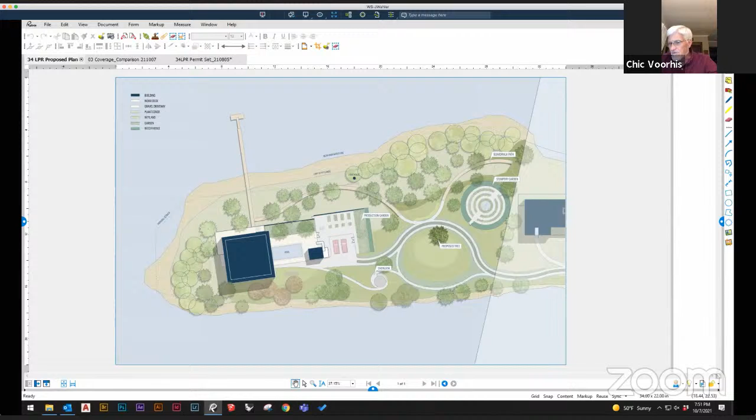Mike, if I could just ask, I see in the lower left corner of the Raynor plan cut and fill calculations. Is there another place where you have this net cut fill? Because the ones I see in the Raynor plan aren't quite consistent with what you just said.

Mike, do you want to share your screen again? I can stop sharing. Sure. The suggestion might be to just tabulate what you described: how much cut, how much fill, and how much export.

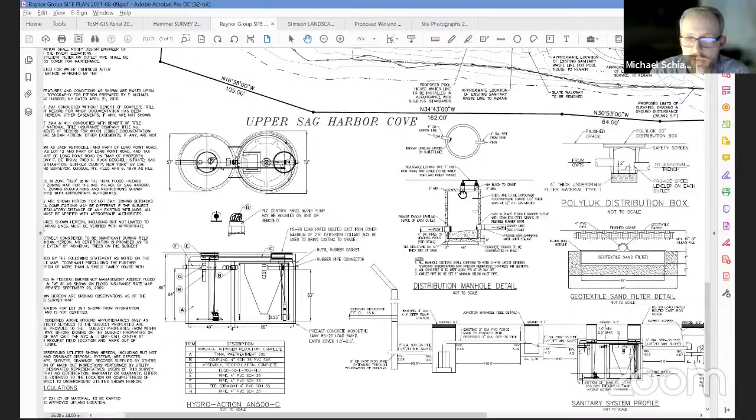I understand, okay, I will confirm those numbers. Because you're correct that at the bottom it says there's 221 cubic yards of material to be carted off site, but I believe we were having a net reduction at the end of the day. I will make sure those numbers are all correct and come back to the board with that information.

Thank you. So at this circular drive, those are 1 foot contour lines, am I reading that right? Yeah, so from the perimeter of the driveway to the top of the center portion, it's about 2.5 feet, something like that, 3.5 feet, yes.

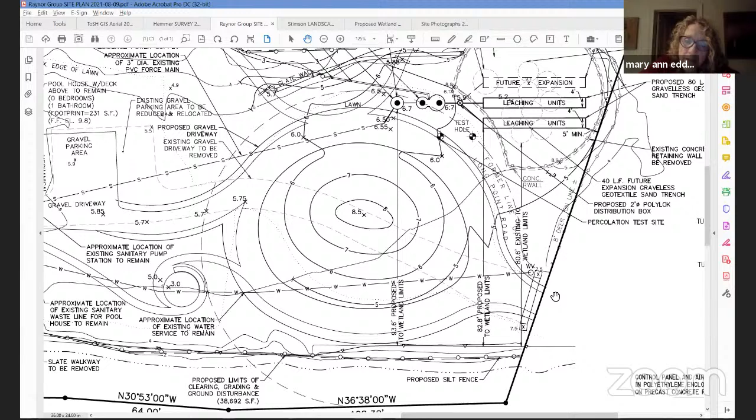And is that the desired effect, to have this sort of elliptical mogul with the driveway around it? Joe? Yeah, that is the design intent, to create a subtle undulation on this arrival experience. It makes me think about Little Island, which I just saw - totally different in scale, but very interesting having these different elevations with native plantings.

Really beautiful. Can I go back to the walkway? A question - how deep are the pilings going to be driven to hold the walkway up? Yeah, we're thinking they would go down to frost depth, so about 4 feet embedded into the ground.

And how many in total? I don't know that number off the top of my head. You said they were 8 foot on center? Correct.

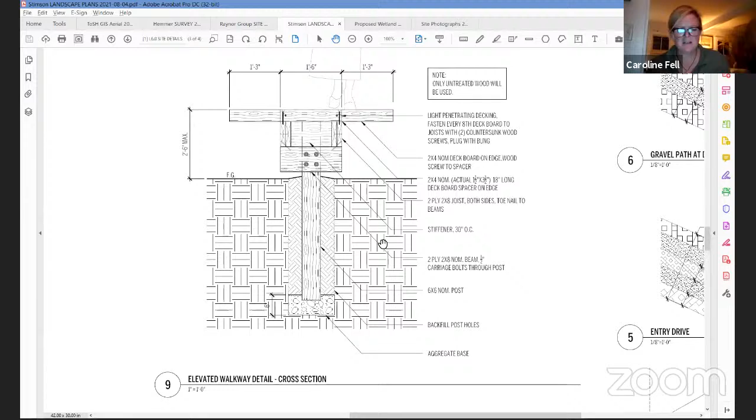Chic, does this have any effect by driving these in? Any effect? Yeah, it's a temporary construction impact. It's something that's commonly done in these areas.

I was going to point out that the walkway does come quite close to the wetlands. And I understand the curvature, but looking at it, there might be a question if that could be set back farther, or the curvature could change a little bit to set it back farther. But I see a temporary disturbance. Maybe we should get a construction management plan so we understand that a little bit better.

It's a good question, Lily. And those pilings will also be backfilled, correct? Obviously.

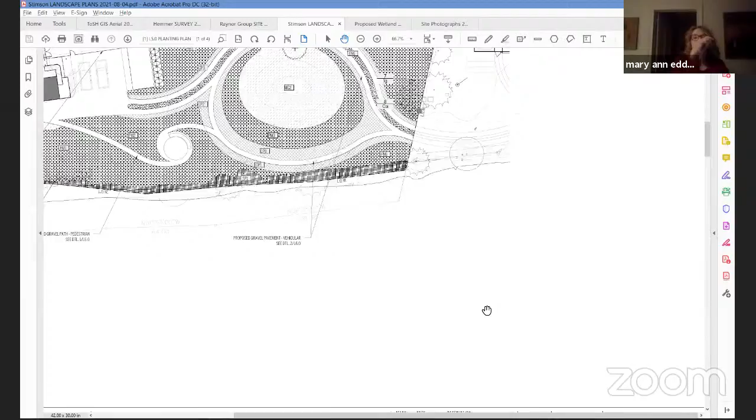You bring up a good point, Lily, because we don't usually let fences go through wetlands, and here we're potentially giving a nod to a walkway through the wetlands. What is the purpose of this? It's not in the wetlands itself, but the buffer. That's a 15 foot buffer line on that property. And what is the point of the walkway? I mean, I understand for a lovely stroll.

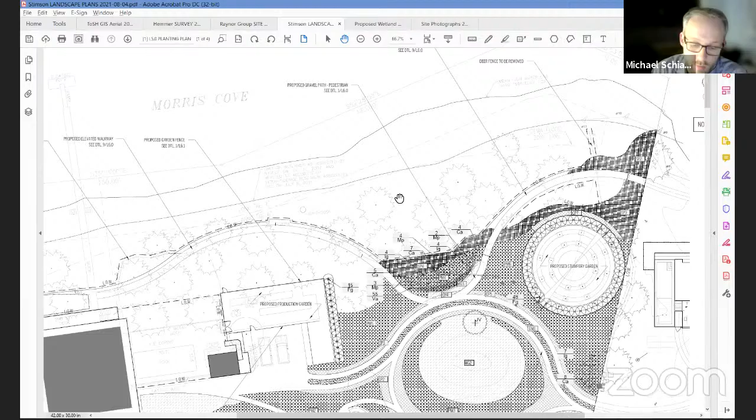It is essentially for pedestrian access to the native area of the property. We did not want to have just regular pedestrian paths going through, so I had suggested instead having elevated boardwalks so that you could have vegetation underneath. It is what is done for elevated dock walkways. Part of this was that I wasn't sure what the harbor committee would think about them, so I thought we would propose them and try to get some feedback, to be completely honest about it. So you think the boardwalk is less intrusive than a grade level permeable pathway, like an oyster shell path?

Well, anything - if it's going through the buffer, we wouldn't allow a pathway like that. It would have to be like going to a dock, or a shed or an outbuilding or something, maybe.

So this property, the length of it, if it's every 8 feet, that's a lot of pilings to be driven in. I don't think they're really driven in. I don't think we should say pilings - these are just fence posts, posts that are being set into grade. So we're talking about a post hole digger creating a 12-inch diameter hole and setting these posts in. It's not being driven in.

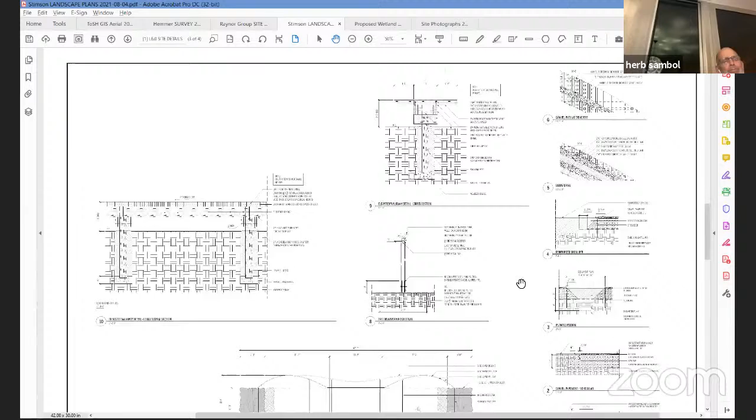So Chick, can you make an analogy between this and a fence, which might have the same kind of posts? We would never allow a fence running through a buffer, would we? No, we have always looked to have them removed from the buffer area. And this really doesn't differ much from a fence, does it? I mean, in function it does, but in terms of intrusion into the buffer, it's kind of the same thing, right? I would agree with that. Well, except that a fence in the buffer creates a barrier for animals of various types, and this doesn't.

That's true. I've seen elevated walkways proposed in preference to paths, because the paths cause more disturbance to the natural vegetation. But it does fundamentally raise a question as to whether these are structures that are subject to some setback rules.

Fred, I don't know whether you can speak on this - can a walkway be a structure that needs to be set back? Oh, a walkway, it depends. Well, it's a raised walkway, it's not just simply a path - it's a structure, definitely a sort of structure. I'm in love with the whole thing, but I'm not sure that it's really copacetic with the wetlands law.

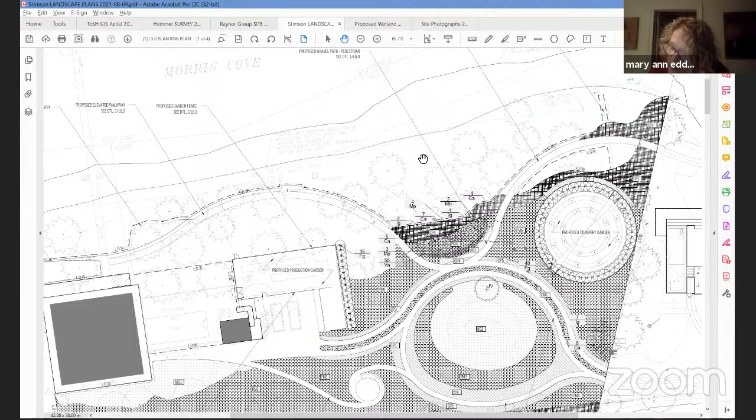Just looking at definitions. A structure is anything constructed or erected on or under the ground, or upon another structure or building, including but not limited to buildings, driveways, walkways, decks, patios, regardless of method of construction. It also includes fences, walls, retaining walls, berms. So a structure under the law is subject to a 75-foot setback.

As I've said previously, just about everything's a structure. That's right. Where is the 75-foot line on this?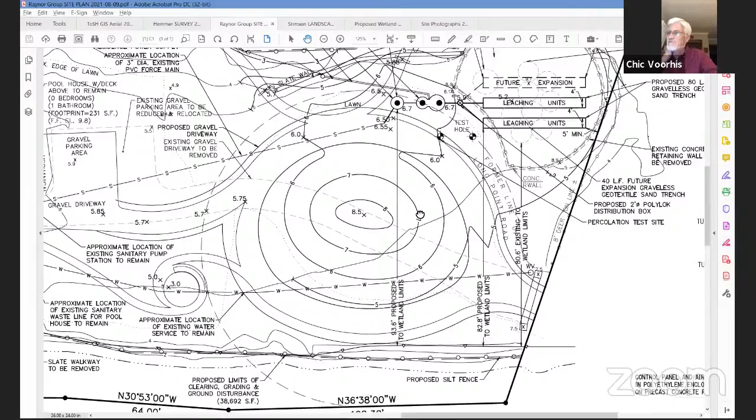That's a difficult question because it comes from both sides of the property. Yeah, it's the middle of the property essentially. Over on the east side, there's a 75-foot line shown from the wetlands to one of the components of the sanitary system, maybe the existing system, just to give a relative look at that.

I really liked it, but I don't think it works with the wetland law. So just for the sake of discussion, what if we pulled them further away from the wetlands?

And what if we were to -- so right now, what we've proposed thus far is an IA system upgrade, which was the main part of this application. And because there was disturbance, the owners believed we'd have to revegetate something, so why don't we propose a revegetation plan for the whole site? So that was the second thing.

So right now, what we're proposing, except for the boardwalks, are things that would normally be considered mitigation measures. Would we be able to instead, or in addition, propose to covenant part of the property as mitigation for the boardwalks?

I don't know what you have in mind. What are you going to covenant?

The existing structures installed here -- the house was pre-existing non-conforming, and then it was renovated between 2008 and 2012, and so was the swimming pool and the pool house. When those things were done, it was prior to the current version of the wetlands law, so there were no actual covenanted buffer requirements at the time.

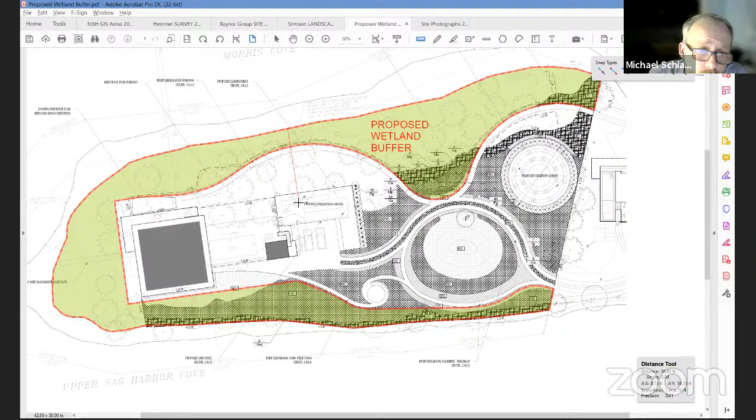75 feet is— no, go 50 feet. Go 50 feet. Okay, yep, 50 feet would be— right. So if you drew that all the way around, even though you're putting an enormous amount of native plantings in here, it doesn't quite meet the law. You do have an exceptional piece of property.

I think because this is such an unusual property, applying the same requirements we would to another property is impossible. And obviously they have a pre-existing structure here, which they don't have to change. Again, I think it's a question as to whether we're getting a net benefit with this.

Again, I'm not against the walkway, and I'm not saying the walkway should be set back a certain amount. I was really asking how we should treat the walkway, and whether it had some negative impact. And I don't think Chic has answered that.

If it's a structure that has no negative impact—and again, I have seen elevated walkways proposed, frankly, by the DEC, in preference over, let's say, a gravel path or an on-grade path—because it allows for the natural plants to grow up underneath it. So this may be preferable to having people walk on grade in those areas, which we couldn't actually prevent them from walking there.

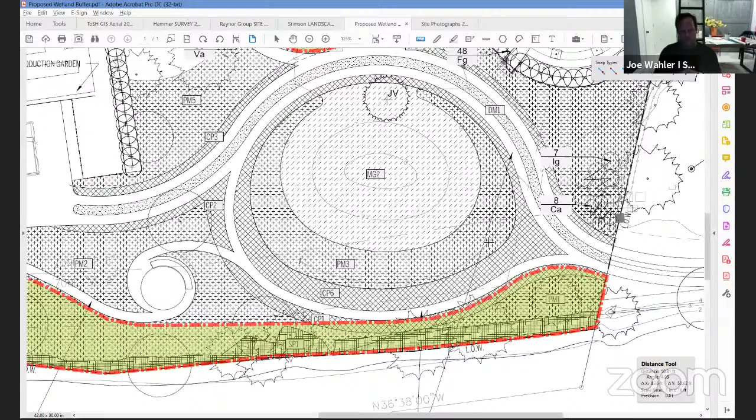Yes, I wanted to clarify that is not a driveway. Mike, if you zoom in there, that's just a reinforced soil zone that is still planted with native vegetation. That's CP6 zone. So the driveway is only the 2 tire strips that go around the top side of the mound. The soil is reinforced so fire vehicles could make that loop and drive over the native vegetation, but it is not a paved driveway.

Do you have a picture of that? That's very well thought out, I think. When you look at it, Mary Ann, do you see what he's talking about with the drive strips? I agree, that's great.

That's not a wide, 8-foot wide, consistent material. What kind of material? Most of that zone for the turnaround is native vegetation. I think that's quite elegant. What are the 2 strips? The white represents what? The 2 tire strips, that's a gravel surface, a pervious gravel surface where the tires of the vehicle would run. In the center, that zone that's stippled is native vegetation, planted median underneath or between the wheels.

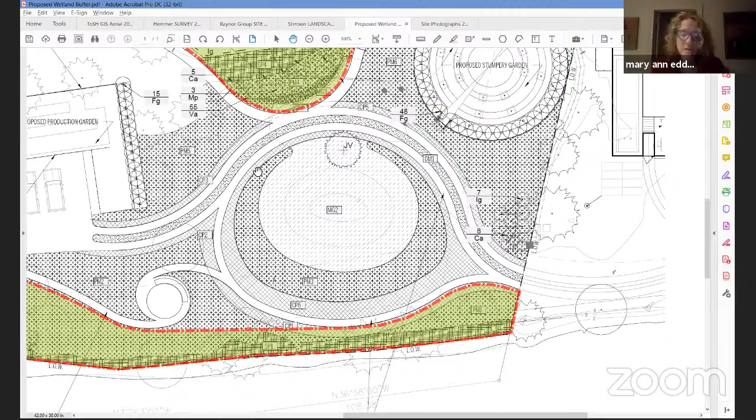And then for the fire vehicles, which would happen probably rarely if ever, it's just a reinforced soil, a sandier soil profile to support a truck if it needed to make that turnaround, but it's all native vegetation. And then you'd have to bill the fire department afterwards to repair your landscaping. Right. All right, so I know John keeps asking, and all I can really say is...

Typically when we see elevated walkways to access a beach or a dock, they're generally perpendicular and a shortest route. And the idea is to elevate them and use through-flow decking so that vegetation can grow underneath. The impact of the elevated walkway, I imagine there's some displacement of native buffer. Certainly it's minimized by allowing vegetation to grow, but that vegetation is cut, especially if those walkways are less than the height needed for not having to have a fence on it. So I think there is some direct quantifiable displacement of buffer.

And I just do get the sense that the law does speak to a structure, and that puts it into 285-9D. I think the applicant should look at that as well as the 50-foot calculation, which can be variable. So maybe some type of walkway could be appropriate if the buffer calculations worked out, and maybe it's set back a little bit more. But it seems to me to be a fairly substantial installation. Right, definition wise, it is a structure, and it's coming very close to the wetlands. So I would look at alternatives, and I think that's what the law really speaks to.

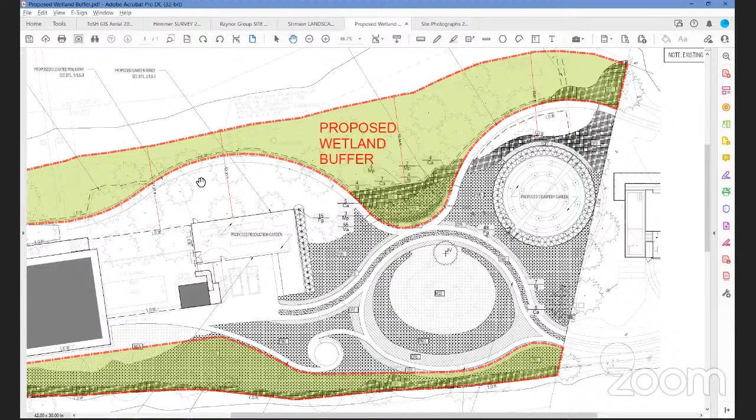And we're dealing with an existing turnaround that we're now going to revegetate. So without those walkways, would the project be... I don't quite understand what you're saying. Are you suggesting that the buffer move down to the north side of the house? The chartreuse area would come all the way down to the house? I'm not sure what I heard you say.

Well, I guess the question I would have is, if we were only doing the septic system and changing the driveway, would we have to propose a wetland buffer specifically? Because these two things, the native vegetation and the septic system, are typically things proposed as mitigation measures. So we are proposing those things outright as the main aspects of the application. So would we need to propose a buffer specifically as part of that?

I know how important they are. I just don't know how the law reacts to us proposing something that is essentially making the site better to begin with. We're improving setbacks for the septic system, and improving the amount of native vegetation on site. So I wasn't sure if we would have to specifically have a native buffer proposed.

What I was showing was what we could propose as part of this discussion. And I could certainly come back and have a proposal for a buffer, but as part of the initial application, that was not in the discussion because we were not sure how the board would treat what we're proposing.

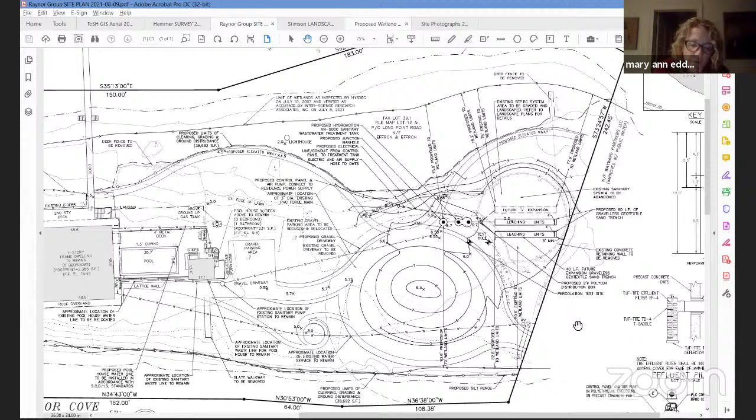Right, Chic, I don't know. Can we bifurcate this? We've done it a couple of times, but where we give a go-ahead for those two items, I'm just not sure that there's much reason for the applicant to come back. If we really feel like maybe there should be more buffer up there north of the house, or, I don't know, is that north?

I get confused. Yeah, but we're treating it as north. I guess technically it's northeast, because north is actually towards the left of the drawing. But, the space that is, I'm sorry for jumping around, I already have this scaled.

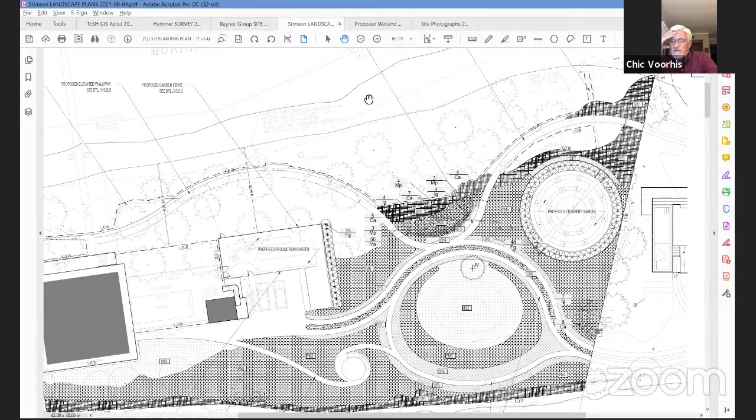But the space between the wetlands and the existing, the proposed limit of work here and the proposed production garden is 50 feet. Wow, perfect. I'll just say that Mike came in originally saying that there's a lot of unnatural vegetation, lawn that was being removed and things like that.

We do have a situation where the turnaround is getting closer to the wetlands, and I'm looking at an existing aerial photograph, and currently the turnaround is just grass area on each side of the driveway. Is that stabilized soil, or just compacted? It's stabilized turf, I believe that was what was proposed when it was originally installed in 2012.

I'm just reading standards for issuing a permit, and it does say permits shall delineate a specific buffer zone from the wetlands boundary for activities regulated under this chapter. The approving authority shall, to the maximum extent, impose a minimum buffer zone of 50 feet for turf, fertilizers, pesticides, herbicides, fungicides, and similar treatments, landscaping, or other clearing or disturbance of natural vegetation.

So obviously the committee has authority to do what they feel is appropriate under the law. This provides the guidance. And I always like to see things on a plan, so we know what we're approving.

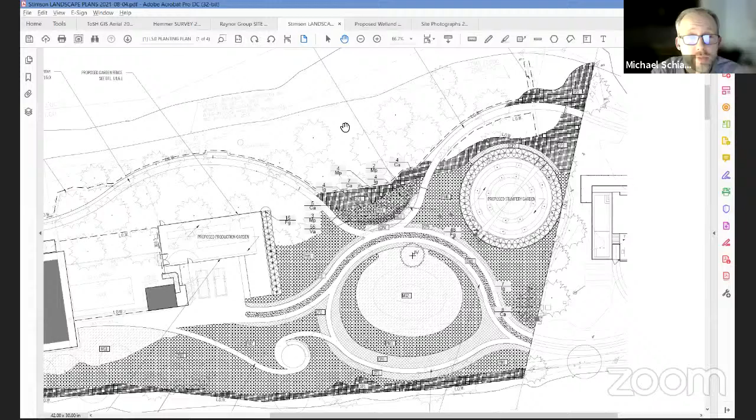We've come to is that... that sounds bad, but that's not what I meant. I really just meant that Chapter 285 has specific structure setbacks, and technically under the definitions, a walkway is a structure. So therefore, we have to meet that setback or show why we can't meet that setback.

So I understand. Okay, so I would suggest that we adjourn this. Compromises are possible here, it's not set in stone, especially where it's impossible to have the structures meet the required setbacks, as on your lot.

Right, yeah, I think also, just real quick, one part of my feeling about the walkways is that I did feel like they were kind of in keeping with the policies of the LWRP. The LWRP talks as much about providing pedestrian pathways to enjoy maritime access to areas of habitat and that kind of stuff. But I like the idea of someone being able to enjoy their natural setting.

So when they asked whether they could have pathways through here, I said I'm actually not sure whether the agencies would approve it. I know that elevated walkways are more acceptable in certain cases because they do allow vegetation as opposed to no vegetation. I'm just trying to explain how we got to where we are.

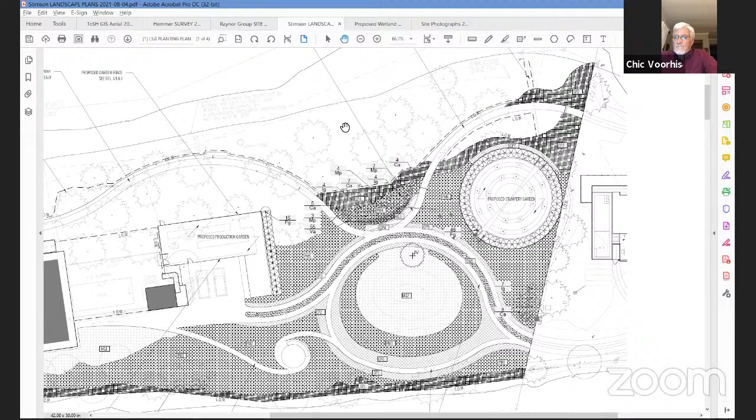Yeah, I don't think any of us fault you for coming up with something that's beautiful here. And I think most of us feel we have to say probably not. I understand. I think that we're going to have to adjourn this, and we hope to see this come back with some further refinement on the buffer question.

Can I say something here? Sure. This is David Nelson from Bluff Point Road, across the cove from this particular property. So my question to Mr. Schiano, who has done a lot of work, and I appreciate his efforts...

How high is that elevated walkway as you expect it? And also, how wide is the entire property, kind of from east to west? I'm not sure people really understand how small this property is. And it's also on a private road, so there are no people walking down this road enjoying the views and the natural environment. So I would like to know the answers to those questions.

So the first one, I think, is the width of the property at its max or min, and how high. I think, what did we say, that they're 4 feet high or 3 feet high, the walkway? 2.5 feet high, 4 feet wide.

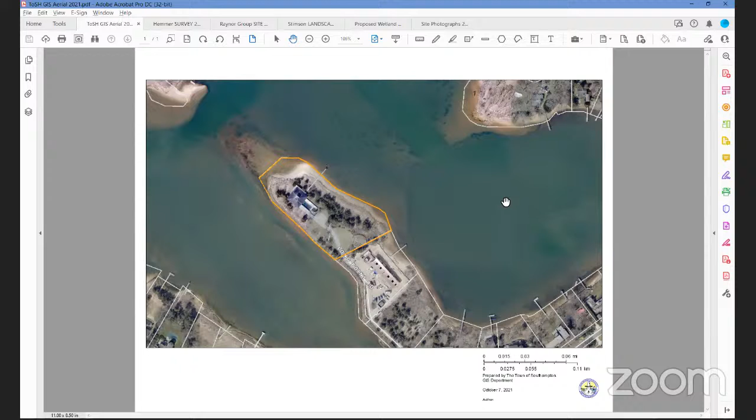You know, kind of down to the right. I'm just saying that I know properties down at the bottom of this picture that have elevated docks that are like 10 feet above the water line, and they're obtrusive and unnecessary. I may have actually lived here when they were built, so perhaps that's on me. But now I realize they're very high, they're obtrusive, they're metal, and it really is not an addition to our environment.

So I think you bring up a good point, and I hadn't really thought about it. In my mind, I thought there would be quite a bit of vegetation around this walkway, and I hadn't considered that walkway standing out from the water and being visible across this inlet. Well, it's very visible, and there's no vegetation there other than one little tree line, which I don't know exactly where that is versus the buffer line.

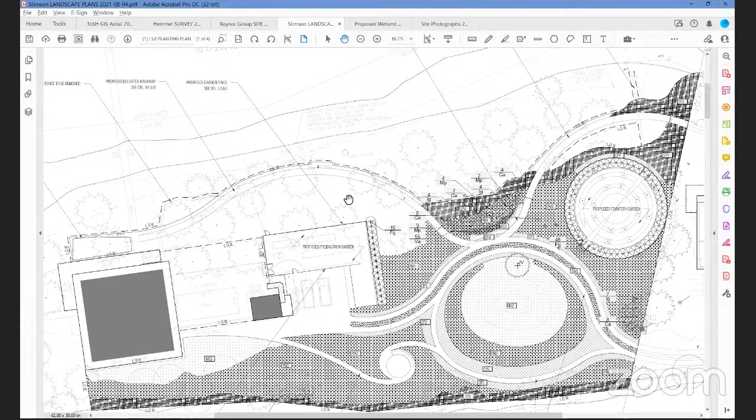My particular point, I'm sorry to say, is the property which is south of that has been out of compliance for Harbor Committee jurisdiction. I think it's 28 Bluff Point Road, Long Point Road, which is being constructed right now. So if you look at the beach line, it seems like there's a kind of cutout there, and there was a white sand beach on that property where there's no white sand beach anywhere else on this cove.

Are you talking about the left side or the right side of this peninsula? I'm sorry, I can't tell you, but the property we're talking about is 34 at the top left, and as you come down, I'm seeing a property line in yellow, and below that a construction site. If you look out, they have a cove, and there's a complete cutout on that cove that has no vegetation, which I would suggest is unusual.

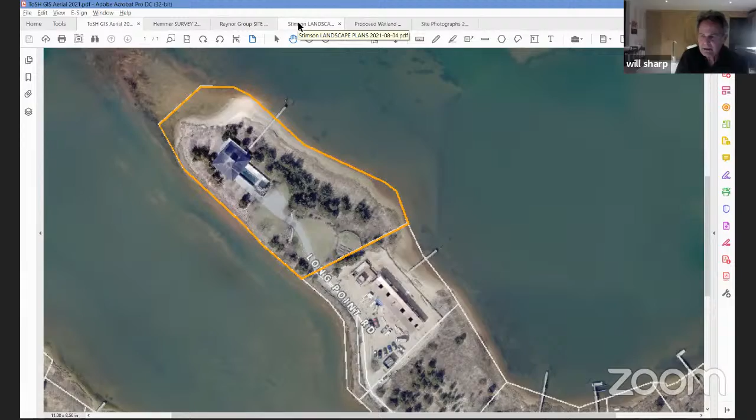Can we go back to this project? I think Mr. Nelson brings up a good point, which is from the water, you're going to be looking back at the elevated walkway, and it'll almost read as a bulkhead, an intervention that is not going to complement too many neighbors. I could understand that. In the interest of moving along, can you present something with the information that Marianne has asked for and talk to your client about getting rid of the walkway? I suspect we will get a lot closer to closure on this if we go that route, and maximizing buffer if need be when the numbers come back.

Understood. Okay. So can we have a motion to continue the public hearing, but have a motion to adjourn this application until November 4th? I'll make that motion. Thank you. Second? Thank you. Second. All in favor?